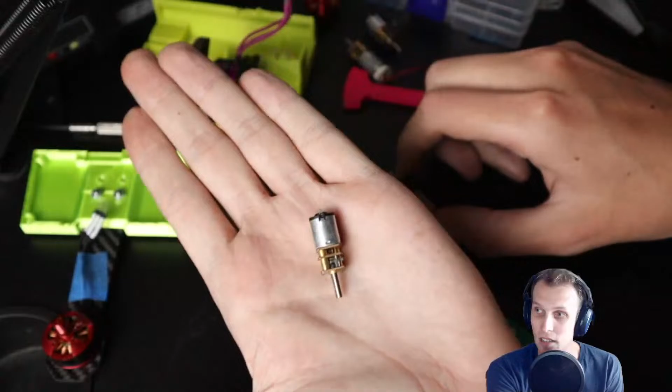So let's have a look at some of the components that I've got to do that. First up, we have these. These may look like a regular N20, but they are not. They are an N10. This here is a regular N20.

You can see this boy is ever so slightly smaller than our N20, and I've measured it out now, and it's like 5 millimeters shorter or something. It's not a whole lot, but it does have one advantage to it.

If I can get my scale open, have a look at the weight of these two things together. So this is the N20 — the N20 is about 9.4 grams. The N10, on the other hand, is 8.2. So we save a whole gram by swapping motors, and that means we save 2 grams by swapping the two.

There are other options for motors that are smaller and lighter, and I've used them in flea weights in the past, but they're plastic geared, which means that putting a very, very heavy weapon on top of them, they're just going to explode in the first hit. There is no question about that at all.

Okay, how is this going to impact the pits at ARC? This is going to be a very, very heavy weapon on top of an ant-weight robot. This weapon is going to be half the weight of the robot, if not slightly more. If anything, when I hit somebody, the entire robot is going to go flying.

I'm probably going to go over the walls. If I don't go over the walls, there's a high likelihood I'm going in the pit. That is what it's going to be, unfortunately. This is the price I pay for the absolute chaos I'm about to inflict on the arena when I get this whole robot going.

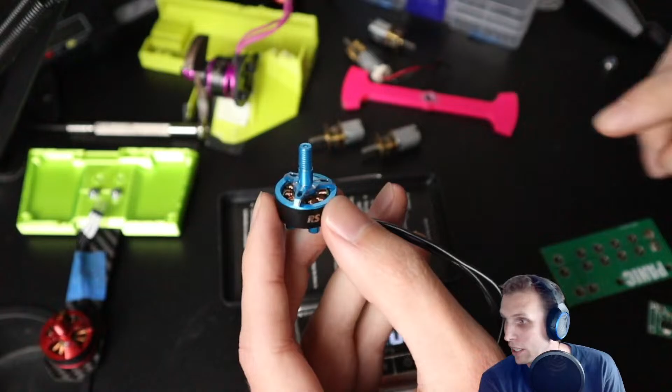There we go. This is a 1507, as you can see. It spins faster, it's slightly smaller in some aspects and not all, but it does have a 3mm weapon shaft at the bottom, like a motor shaft in through here, so it's actually going to be stronger than these 1806s.

Now, the problem with this that I found out earlier while I wasn't actually streaming was if we throw down the motor, that's about 18 grams. Our new motor is actually slightly heavier, but it also has a lot longer wires. So cutting these wires all the way back is probably going to save us a decent amount of weight, maybe a gram. So the difference between these two motors is actually fairly similar in terms of weight.

The other thing we have going for us with this guy is that it has quite a long weapon shaft, so we can probably trim this down a little bit and still have a lock nut going on, and get that all working.

You love my fight recap videos. Cool, I'm glad. I really enjoy making fight recap videos.

There was supposed to be one out this weekend. Unfortunately, things got very, very busy. That's also partly why I'm streaming very late at night. I was supposed to get CAD stuff done this weekend and just ran out of time. Life happens sometimes. So yeah, there was supposed to be one out, it might come out Tuesday. It depends on how things go this evening and tomorrow.

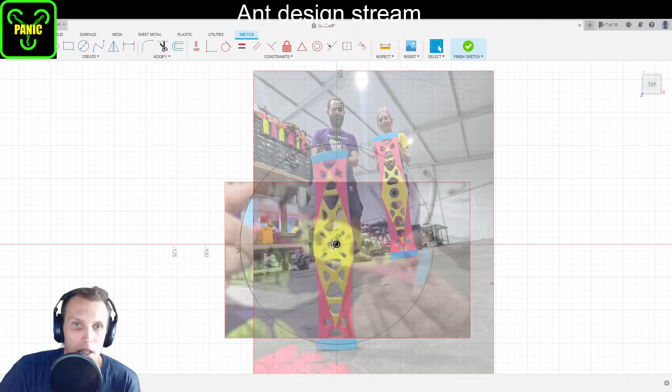So the problem that I'm seeing here is if we actually have a look at this right in the middle here, this shape is the thing that I don't know about at this point in time. It's this kind of weird clover shape thing going on, and all I really need to know is if a 5mm bolt is going to fit through that and not be too loose, which is very, very hard to tell here, but I think looking at this very blurry photo, that is going to be right.

Now, the reason I've got this one rather than this one is that this one has kind of a parallax thing going on, like the blade is kind of tilted at an angle. It's not straight to the camera, which means you can't get an accurate idea of the hole diameter, unfortunately.

So this one is from a different image of the team holding it up in their fingers, and it is actually just ever so slightly straighter on, which means that while the pixelation in this is just disgusting, you can basically just about tell that it is around about 5mm. It's close enough that I'm like, yeah, I think this will be okay for what we're trying to do here.

Will your new PCBs be lighter because they save on wiring, or will they be heavier because of the PCB material?

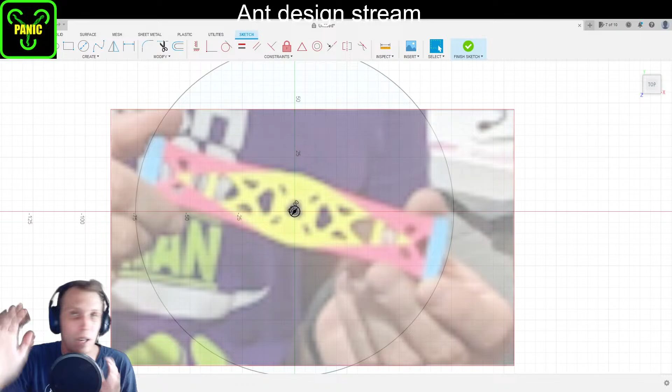But at the moment, this rough thing I've done here has made me confident enough that I'm not going to need to print a placeholder or something - that hole is going to be about the right size for my 5mm bolt hole here.

So, okay, we're going to go back to Tinkercad now. Not Tinkercad, 123D Design. Here we go. I'll catch you up a little bit on what I was doing before I actually pushed the go live button, because yikes.

Anyway, let's take a look. So this is currently where the design is sitting. This big red section at the top is the area that the blade itself is going to carve out. This is a 6-inch, or 152 millimeter - sorry, not sphere, cylinder, that's what I'm going for. Wow, okay, yes, streaming may have been an interesting idea this evening.

Anyway, then we have the motor that I mentioned before. Now, one of the things I'm going to quickly run through, because I did actually try and do this on camera and then messed up my cameraing, is I'm going to go back to the desk cam.

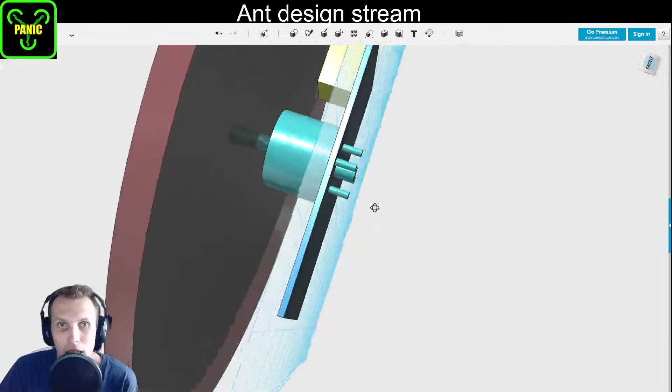I'm going to show you how I got the bolt hole patination in the bottom here, because it's actually quite easy to do. Now, what I'm going to do before that is take a quick copy of this, move it over, and delete the bolt hole patination off the bottom, and we're going to redo it together, because I have a method that works for me. I don't know if it's a correct method, but it seems to do okay, and it might help some of you out there with your CADing in the future.

Whoops, don't do that. We're going to go down. I think this is going to be 7mm. Yeah, cool. Right, so we've got a blank face on the bottom.

You missed fighting me at the January meet of ARC. Building a second version of the bot and looking forward to coming for more events. Oh, cool, yeah, it'd be good to see you at an ARC event. How did you go in the ARC event? Obviously I missed that one because of featherweight fighting, which is unfortunate that they landed on the same weekend. Thankfully, the next set of featherweight fights are not on the same weekend as ARC, so that's good - I get to do both. Yay!

All right, let's actually get the bolt hole patination going on this thing here. So how do we do that? Let's go back to the desk. To do this, I'm going to zoom us down onto the motor and get my camera to actually focus up, and then I'm going to grab some bolts.

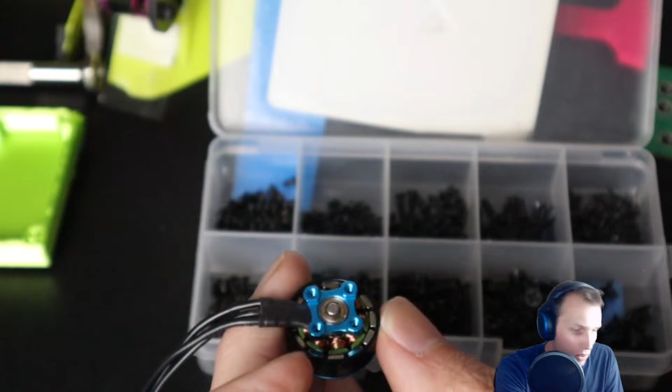Now, normally with this you would need to work out what size bolts they are, but I know now that these are 2mm bolts because I did this earlier. So I'm taking a 2mm bolt, which is what this is, and jamming it into here, one into each side. So I've now got 2 bolts, and I'm leaving them stuck out on purpose.

I then grab my calipers, wherever I put those. Here they are. And I'm going to first measure my bolts. So my bolt is a touch under 2 millimeters, and that's about right. Bolts never are exactly - like an M2 bolt is never exactly 2 millimeters - because of thread pitching and all that kind of stuff, and clearance, and yada yada.

So they're just a touch under 2 millimeters. If I then measure the outside, grabbing in there, we get 13.5. Now, again, my 2mm bolts aren't quite the right size, so that means these are about 14mm edge to edge here. And that means the inner distance should be 10mm because you take off 4 millimeters. Yep, so there we go, 10mm.

And that means the center to center point is 12mm. If I get my calipers to roughly 12mm, that should be roughly center to center, but trying to line that up by hand is just rubbish and ridiculous, you can't really do it. So by measuring the outside and the inside, you should get an idea of what that bolt spacing is.

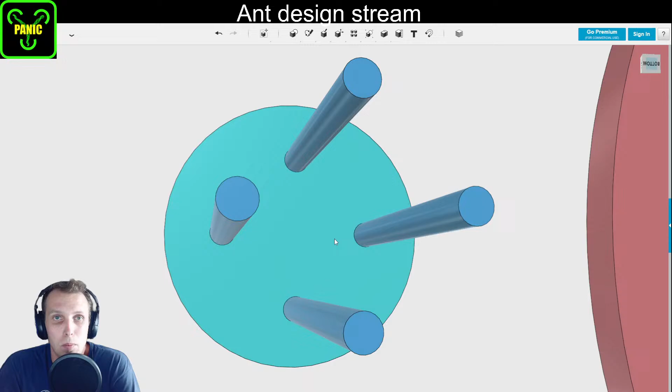The other thing I will say is that while this bolt patterning is usually the hardest part, the thing I always forget to do is leave an extra hole here. Now the reason you need that, going back to the desk, is for our center point in here. The back of the shaft, especially on, well, not this motor, because this motor has been designed so the shaft doesn't actually stick out that much.

But if you look at like an 1806, the shaft of the motor sticks out a great deal, and it also has a circlip on it. That circlip spins with the motor, which means it's spinning at very high speed. So you need clearance around that circlip. Otherwise it's going to be rubbing against your chassis, creating friction, slowing your motor down, and putting a lot of energy drain into your motor. So you always need to make sure you've got a hole with spacing for the shaft as well.

So if we go back into here, I know my shaft is 4mm, so we're just going to put in... whoops, that's way too big, that's 4mm radius, that's not what I want. I want 2mm radius for a 4mm shaft. Put that in there, and then I could merge all that together and shorten my bolts down, and you'd end up with the motor that I made before I actually went live. So, yes, there we go.

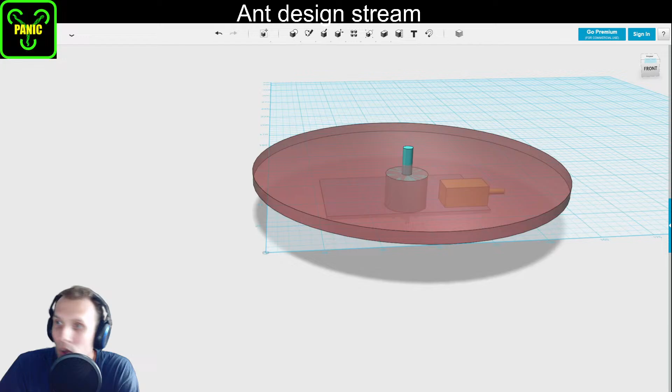Any word on when Robot Havoc will happen? Yes, Robot Havoc 6 will happen in August. It is part of Science Alive, it always is. Let me double check when Science Alive is this year. Science Alive 2013 is the 5th and 6th of August. So that means Robot Havoc will be on at Science Alive on the 5th and 6th of August this year. I don't really know much more about it other than that's the current plan. Also nothing is fully locked in yet, so don't take my word as absolute gospel, but that's when Science Alive is happening this year, so that is the likely time for Robot Havoc to happen again.

Mini hijinks, kind of. I've got the hijinks bar coming in, however I think making it into an undercutter is going to be exceptionally difficult, so we're not going to do that. We're actually going to make it an overcutter, which is what this CAD currently shows.

That's where we're going to try and go with this design, mostly because it's such a large blade. You can see that this is a 6-inch blade. Trying to get the wheels out the other side of it anywhere is just so much size and so much space that it's going to be too big to try and do anything like that. So yeah, overhead spinner it is instead.

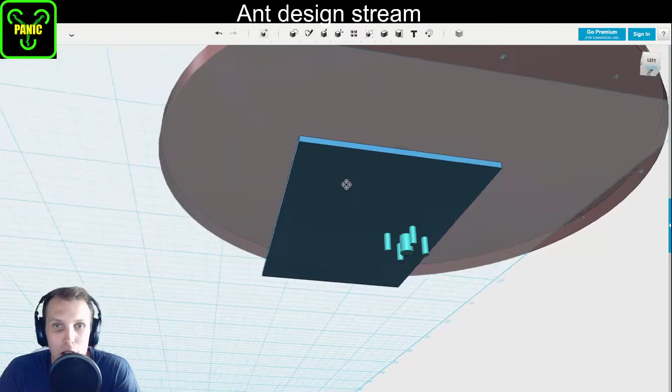In this case, I have currently got the N10 motors, that is our brushless motor, and there will be another N10 over this side as well. I'm currently thinking about using PCB material for the base plate of the design here, because I've been messing around with using that as weapons very recently, and I'm thinking that as it works for weapons, it should work as a thin, light base plate material for a robot that needs to be as light as I can possibly get it.

Any progress on Zap being built, or are you focusing on perfecting the Beetle version?

I am focusing on perfecting the Beetle version. The last event that we went to, I took the Beetle version 2 without weapons, and it performed way better, which honestly was a bit exciting and disappointing all at the same time. It's exciting because I got the thing working finally, and it actually spun up and it melted and it hit people hard and it threw itself across the arena. It was great, that was a lot of fun. But...

There wasn't that much changed between it and the old version with the weapons, other than removal of the weapons. So the big thing that got changed was the removal of the weapons, which means that removing those weapons increased its performance, which is real sad because I want the weapons to work really, really badly, but they just haven't been so far.

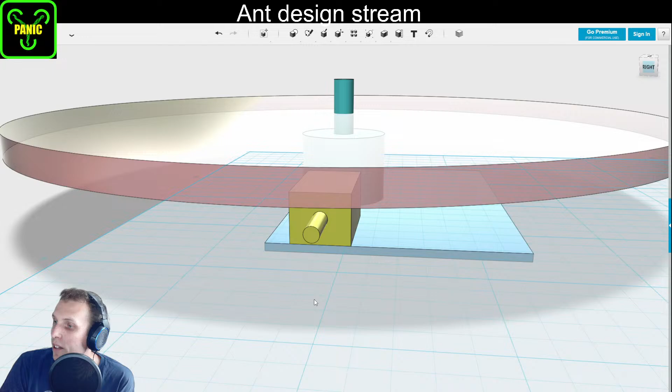How will the super glue bicarb soda do as armor for a chassis? That is an interesting question.

Super glue and bicarb soda does create some kind of plastic polymer of some form, but I don't know how effective that would be. I don't know the material properties of the plastic material that is created by super glue and bicarb soda. I've used it as a quick fix tool before to try and get some things working and stick some stuff together fast, but I've never really tried to put load on it or have it impacted.

It'd be an interesting one to try. I've seen people try and molded dice from bicarb soda and super glue, and I know that layer adhesion is kind of a difficult thing to get right, so I feel like you're never going to get a perfect brick of material that would be useful as an armor panel, for example.

For the Zap Beetle, what if towards the outer edge you had a stylus that could help provide sensor data? Yeah, that is one of the other things that I'm looking at. Currently I've been using what's called dead reckoning - I've been using the speed of the wheels to determine how fast the Melty is and how fast it's spinning and stuff. But that isn't the greatest solution for melting.

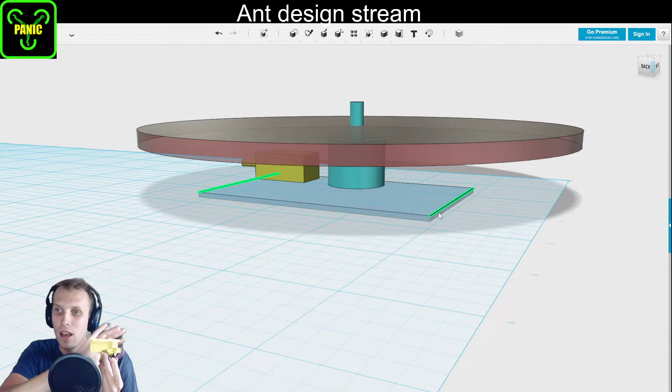So anyway, we have a little box here, or a little PCB stand-in base plate that is currently 51 mil long and 82 mil wide, which is good. I've got this as a party here, and it is bigger than this by far, and it ran like a 25-gram weapon. So we don't want to be anywhere near the size of this as a party. We want to be as small and compact and tiny as we possibly can be.

Now, to aid in that, what I'm thinking is I'm going to build an ESC into the base plate. So rather than use DF Robot motors or a Malenki Nano or anything, I'm going to build my own ESC directly into the robot's base plate, and also run all of the wiring through the robot's base plate too.

And even with all of that, I still might need to put speed holes in it, just because it's 1.6 mil thick of fiberglass. It's going to add a little bit of weight.

In fact, I do have a board here, a PCB, that I can put down and weigh really quick. It's not quite the same size. All right, that's 8 grams. That's my power distribution PCB. That's 8 grams with a lot of copper in it, because I had to put a lot of copper in these so they survive distributing power. That's 65 wide by 33 long.

That's 8 grams for something that is smaller than this, in both dimensions. Our chassis needs to be about... where are we? I can't get that to work on camera. Yeah, so our chassis is going to need to be bigger than that.

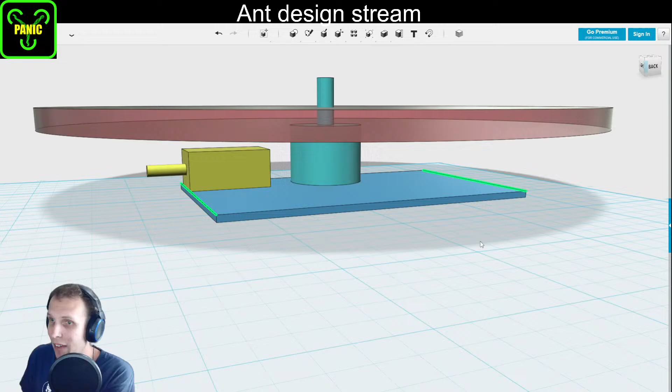Maybe the PCB substrate needs to have holes in it. It may be a case that we need to run some speed holes back here where we're going to be mounting the electronics, and then just run tape underneath or something. Or tape both sides, like a tape sandwich, to block those holes and run way less weight. But it will probably rely on what we actually do with the SMD componentry that I want to put on this board. Anyway, we should keep going with this.

We're going to put down our other motor literally by mirroring it into place. So if we go 10 mil, we're then going to mirror the whole motor by that plane. Done.

All right, so at the moment we currently have our weapon blade, well, our PCB sitting directly on the ground. That's not going to work. We need the whole system to lift, and we probably need, at a bare minimum, 2 mil clearance just for bolt heads and stuff. So in fact, what I'm going to do is 2.5 mil clearance, because that's going to give us, hopefully, enough clearance to sit everything in underneath.

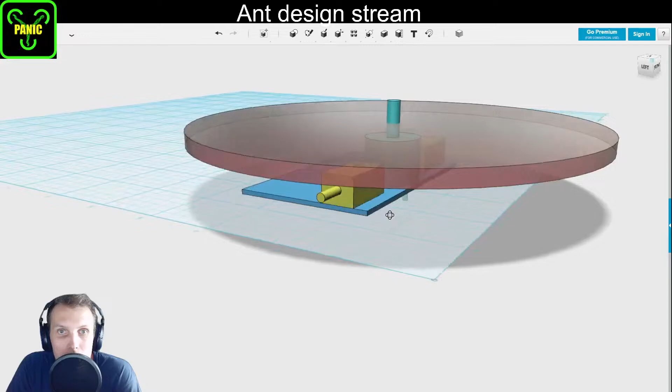Now, the question here is, I need to actually put a floor down, so we're going to put down a block, and then push that down into the floor, or to the floor level, and extend it.

Whoops, that's not what I wanted to do. That was the wrong tool. This is the right tool.

Bam, okay. So now I want to look at shaft to floor, that is 7.8. And shaft to weapon, that is 9.5. So we've got like 1.5 mil between our wheel and our weapon. Yikes, that's probably going to be a little too close. So let's see, we're 2.7 high. Let's actually grab all of that again.

I need the weapon and I don't want the floor. Let's push that down by, I think, 0.7. We're going to do 0.5. Okay, so that's going to give us a different distance to the ground: 7.3, 9.5 still. Cool, all right.

7.3. What is the radius of this? The radius of this is 1.5. 8.8. Okay, so let's get a wheel CADed, or a rough wheel CADed. This is going to be 8.8. We're probably going to do 12 mil.

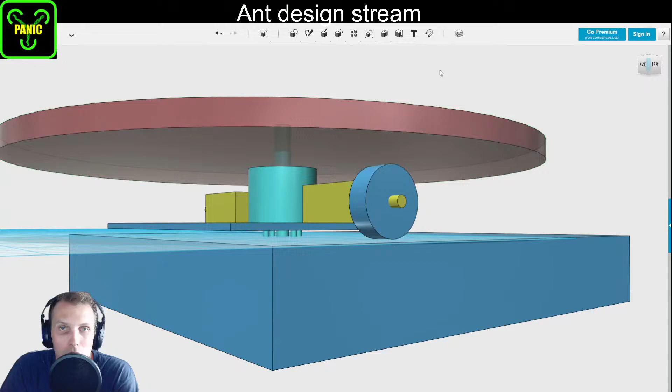That's 2 mil now. Oh boy, 2 mil deflection, and it will clip the wheel. That's honestly not a lot of deflection for a bar this size. Let's actually take a look, how far out is that? 2 mil deflection, so it's 2 mil this way at like 32 distance. That's possible - we could clip our own wheels here if we're not careful.

And I'm going to have to be really, really careful molding and making these, because they need to be exactly on center. Otherwise, if they're 2 mil out, they're going to clip the wheel when they rotate round, unfortunately - clip the weapon when they rotate round.

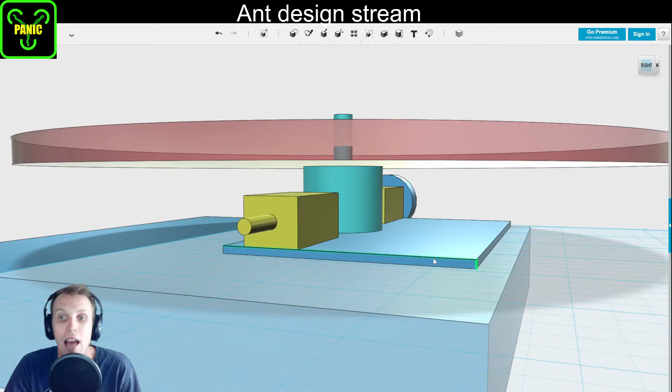So the plan is to have the PCB as part of the chassis. Yes, 100%. It's light, strong material that's really thin, and I think doing that is going to be way better than a 3D print in a lot of ways. Because, yeah, a 3D print - so this is 1.6 mil here. A 3D print that is 1.6 mil would be lighter than this, but it would also break immediately on the first hit. There's no way even an ABS print at 1.6 mil thick survives an impact with somebody else.

So yeah, we got to do what we got to do, and in this case that's a PCB base plate. I'd say carbon fiber would probably be better, but I can get PCBs done quickly and easily, and machining carbon fiber is nasty, nasty business. You need respirators and water filtration, or water running on the part at all times, and even then you need to be really, really careful about where all the dust is. If you can avoid doing it, avoid doing it.

That's why I use carbon fiber drone arms and things, because they are the better option - they're a pre-made thing. You don't need to cut carbon fiber yourself.

Could you make the bar thinner where it passes over the wheels? I mean, maybe, but again, it's the hijinks bar - I'm buying this weapon bar, literally this one. So to make that thinner, I would basically have to make up a little rig where I was spinning the hijinks bar and then push a Dremel into the underside of it at just the right spot to route out some clearance. Theoretically possible, difficult, very very difficult.

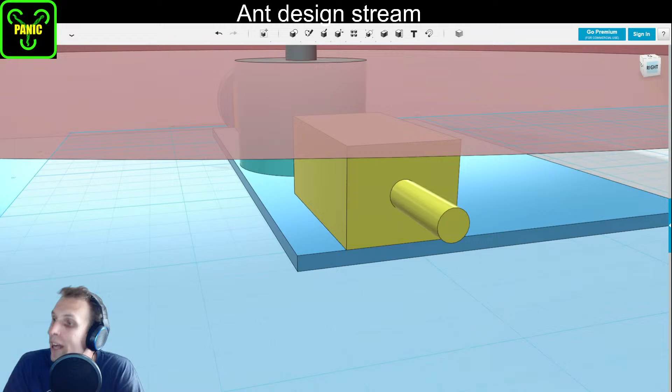It will remove the paint job as well, which would be a shame. Yes, it would. The hijinks bars are very pretty. I love them. That is partly why I'm doing this build in the first place. Well, actually, it's the entire reason I'm doing this build - I saw the hijinks bar online and went, I gotta have one of those. That's just too cool. I just need one of those. And here we are.

Super glue, someone says, for the motor mounting. Yeah, I mean, that would be cool. Let's see if I can get my camera going just for a second, because I did actually do a test just before that I think you will be interested in if I can... no, it's not going to work for me.

Come on. Let me just give me half a second, see if I can get this to work. Let's see if this... nope, okay. The camera has decided... yeah, camera has decided no, unfortunately. So we'll go back to CAD.

Yeah, could definitely cable tie the motor mounts. So what I was going to show you is that this particular PCB, two of those holes have solder in them right now. That is because a while back I saw somebody solder motors to a PCB to keep them in place, and I was like, that's a great idea, I want to try and replicate that. So I took one of my power distribution PCBs for featherweights and tried to solder a motor directly to it, and it held for like half a second. My first attempt, I just waggled the PCB around and the motor fell off. The second attempt survived the waggle test. The second I brought it to another room and dropped it on the desk, though, the motor immediately popped off. So I was like, all right, well, that's not a way that I can do this.

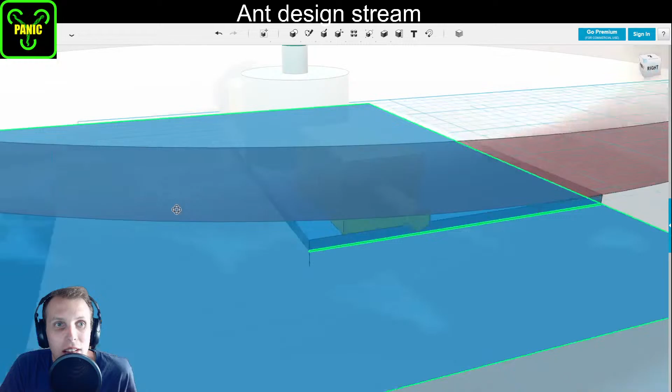I do probably want to print something into this chassis, though, so that I know where to seat the motor. I think that's going to be a good idea, because I do kind of want that knowledge of like, cool, this is exactly where these things need to sit.

Now, the other thing I want to do right now is I want to actually start looking at walls on this thing. So I'm going to hide the weapon for a second, and I think we're just going to start looking at the wall spacing. So I'm going to cheat the walls a little bit here - actually, let's not do it that way. I think I want to shape this out a little bit too, because a square is kind of boring. So we're going to throw some chamfers on the edges, just on these back corners, again hoping that we have enough space for everything. But also, big chamfers on the corner means less material for the PCB, which means a lighter PCB, and we like that. That is a very good idea.

The other thing we want to do, we're going to set up... all right, so radius - actually, we'll do that later. Let's get a set of walls going. The way I'm going to do this is really easy: I'm literally going to copy my base plate. In fact, I'm going to take a second copy of my base plate and leave that all the way over to one side. Then we're going to extrude our base plate to be the height of everything else. Actually, we're probably going to need - yes, of course, it's a weird angle or a weird number. Cool, so that's the height of our motors, that's all the space I want in this thing. I want it just to have the height of the motors. That's going to mean squeezing in battery, ESC, receiver - everything's going to be a tight jam into this. So we probably need a quite solid top plate so that the electronics don't bulge out of it.

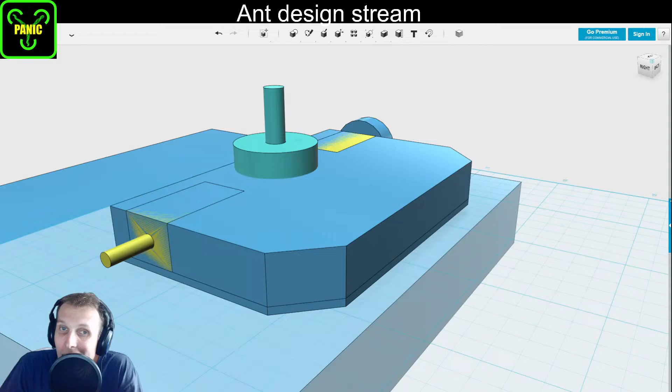Will this have feeder wedgelets if possible? I don't know, it will be very dependent on weight. Because I also want the reach to be as large as possible, and if I show solids, this has got a pretty decent reach at this point in time. But if we put feeder wedges on it, it reduces the reach down a little bit. Also, they're going to be heavy, they'll add weight of some form. So I don't know, we'll see.

I think it will be a case of we'll get everything else together and done, and then if I've got enough weight for feeder wedges, I will reprint a chassis that I can mount some floppy forks to the front of, I think is going to be the go. I don't think rigidly printed wedges is really what I want to go for with this design.

Mostly because I want this thing to sit upright like this. I don't really want the blade to angle down. I've done that before with very obvious results, and they get really difficult to drive really quickly. So keeping the blade horizontal is definitely what we want at this point in time.

Just joined the stream, no idea if it has a name. Just recommend glass cannon - yeah, I mean, that would be appropriate, I would say. I'm not sure if I'm going to call it glass cannon. I mean, I am using a hijinks blade.

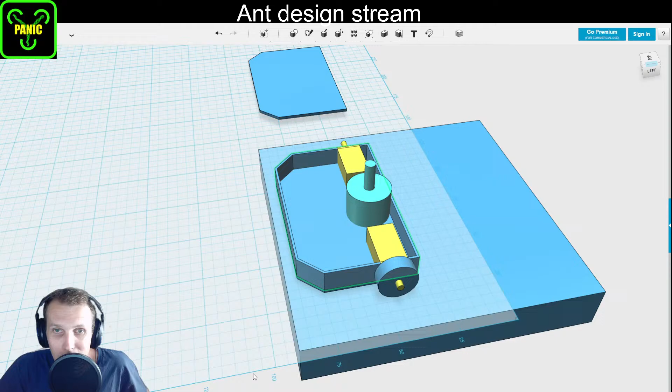I do like the idea of having like an homage to hijinks in some form, but I'd want it to be a combination of things. So like Annie, Are You Okay is a combination of my love of pop culture names and Robert Cohen's crippling depression theme. I'd want the name of this robot to be Hijinks, but pop culture, if that makes any sense. So if you've got any names that fit that bill, please let me know. I am considering anything at this point in time, because I have not named the robot.

So I've just sped through what I did there, but literally I took the same shape as the base, extruded it up to the height I wanted it to be. Then I did a shell cut from it so that I've now just got walls and it's got its own base plate, that's why I moved it across. I'm just going to punch that out now, and now we just have the walls - exactly what I wanted, well, close to. We've got some extra features we need to put in, like these walls don't have holes for our motor, and we definitely need holes for our motors to stick out of.

Low jinx. Oh, I really like that. Mostly because, yes, lower weight class, but also, so hijinks has the weapon mounted underneath, low jinx has the weapon mounted on top - just a complete reversal. Brilliance. That is my forerunner right now.

I'm not sure if it's going to stay that way. It's going to, as I build the thing, I usually come up with names during the build process, so during CAD they don't normally have names. In fact, all of my file structure for my CAD designs is done around weapon type rather than names of robots. So the Annie Are You OK folder on my computer is just listed as Beetle Undercutter - it's not listed as an Annie Are You OK folder because I CAD'd her all the way up and then came up with her name during the build process as I was putting bolts and stuff together.

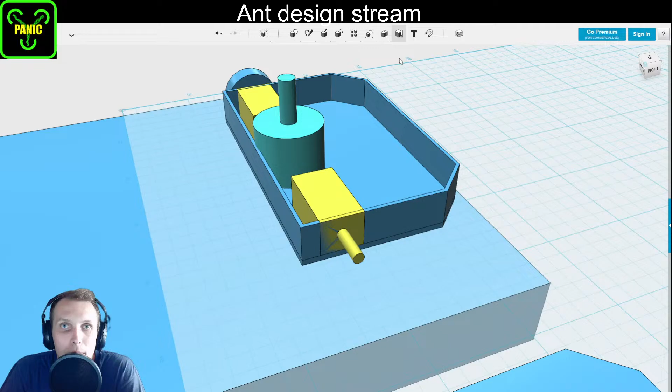Now, next thing I wanted to do was put a shield around this because we don't want anything touching the motor that is spinning it at ridiculously fast speed. So let's see, 10.5. Let's go.

I think that should about do it. And what we're going to do is we're going to cheat this on here. 16 mil down. Okay, cool. And then we actually want to push this down to the same height as... Perfect. So that is going to make up our motor shroud.

Mr. Bojangles? No, Mr. Bojangles is already a robot at ARC. I'm not going close to somebody else's name. We're going to leave that one well enough alone, I think.

So what I'm going to do, we're going to cut the motor shroud down. Where's my subtract tool? There it is. Bam, bam, bam. Then if I move this out of the way, like so, we've now got a space in there. I'm going to push this back 1 more mil, and that is our motor shroud, mostly done.

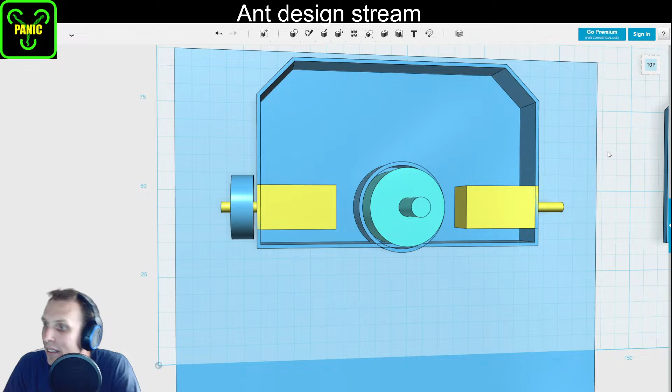So let's go into here. Cool. So that gives us our 1 mil spacing around the motor, which... yikes, that's not a lot. Yeah, it's really, really not a lot. But I mean, it's better than nothing.

And we could push this out a little bit. In fact, you know what, this is feeling a bit sketch. So we're going to push this out by an extra mil just to give that motor just that little bit more space. Now the next thing to do is to cut all of this so that...

Yeah, now which way do I want to do this? This is interesting. Because we can either leave this as a hole in the front, so we have a flat front plate, or we can build this in. Okay, I think I know what I'm going to do. I am going to make the circle on the front, I reckon.

You could mill some 2 mil carbon fiber for the base plate, and add 1 mil recesses for the motors and zip tie them in. It would work, but it's a terrible idea.

Yeah, I could. As I've already mentioned, currently the base plate is 1.6 mil because I'm going to use a PCB. As mentioned before in the stream, carbon fiber and machining carbon fiber is dangerous and messy, and if you're not set up for it, it's just not a good idea. I am not set up for it. I don't even have a CNC in my house. I'd need to go to a makerspace. And then I'm CNCing carbon fiber in a public setting, which, I don't know, that just feels dodgy to me in a lot of ways.

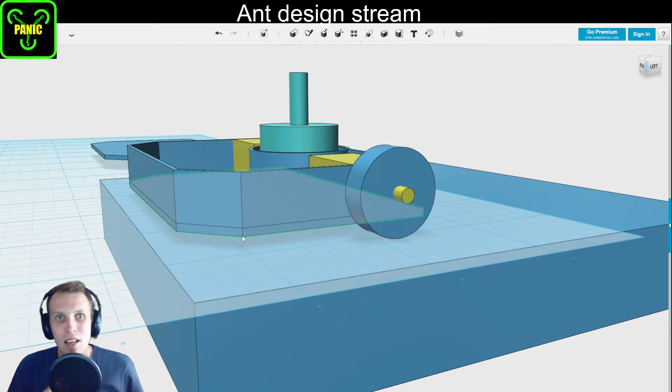So yeah, I'm not gonna mill carbon fiber myself. I'm gonna use PCB material, which does mean CNCing slots into the PCB is going to be very, very difficult. So setting them up and super gluing and zip tying them in, I think is going to be the way to go. Yeah, it's going to be interesting. I've only got two N20 motors, so if I super glue them in, that's the chassis we've got from that point on, I guess, because yeah, we're going to be in trouble if they break, basically.

Right, so I'm going to do a little quick trick here. What I'm going to do is I want to cut out just this section in the middle of this ring. So the way I'm going to do that is I'm going to subtract. I'm going to grab this outer wall, and from that outer wall, I'm going to subtract one of the motor shields, which means that now this wall looks a little bit different.

If I move this out of the way, you can see I've now got two little slots in this wall, which you might be like, well, that's not really going to do too much. But we are going to then be able to grab just the face of that middle section and entirely remove it. Bam, just like that. And now we can put this back in place, like so. And if we merge these two pieces, then that will become one solid part and just work from that point on exactly the way we want it to.

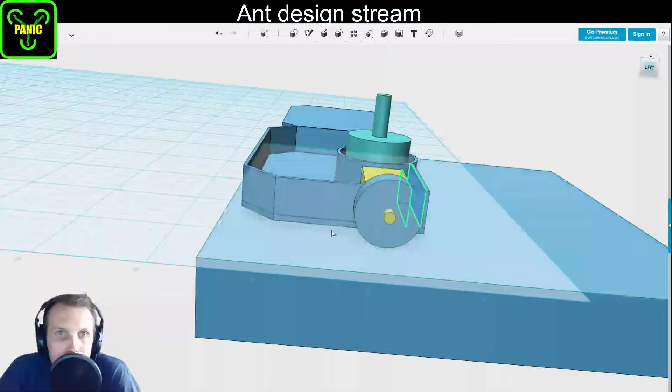Is there going to be enough weight for top armor, or do I have another idea for preventing the wiring from getting sucked into the weapon? There has to be top armor. Yes, I want to do everything I can to get top armor on this design, because you're right. Otherwise, without top armor, everything's going to get sucked up into the weapon.

Now, if I put the weapon back on, from here to there is 6 millimeters. So I've got 6 mil between the top of my design currently and the weapon. So I've got enough space to put in like 2 mil HDPE or a 1.6 mil piece of PCB. Like I might just clamp another base PCB to the top and bolt them together that way. Maybe that's always an option for like a lid design.

Yeah, I don't know, but yes, definitely a lid. Hello in chat there. Yeah, we can't not have a lid.

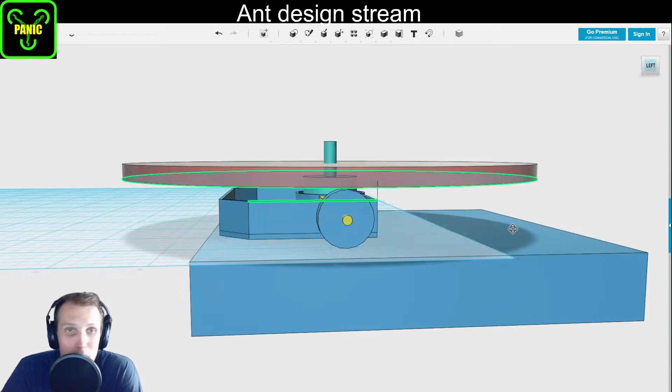I got away with kind of dodgy lids before because I was pushing all the electronics to the back, out of the path of the weapon. But in this particular design, nothing is out of the path of the weapon - it's all in the path. So we need to do something to make sure they don't get sucked up into it and lose the fight by self-annihilation.

Cool, so let's get rid of this weapon again, we don't really need that for the moment. That's the wrong button, that's the right button. The next thing we want to do is add holes for our motors, which again we're just going to do by subtracting. So I'm going to grab that, and subtract. Now our motors have space in our walls.

Now, the other thing that's happening right now is that these walls are ridiculously thin - they're 1 mil thick. They are not going to survive anything. They're one hit and they're going to just be eradicated.

I don't really know what I want to do about that, because thickening them up will add way more weight. Realistically though, it should be pretty well protected underneath the giant spinning disc on top, so unless somebody's really, really low, they're not going to hit us, hopefully. Fingers crossed - it's going to be quite the challenge to hit us.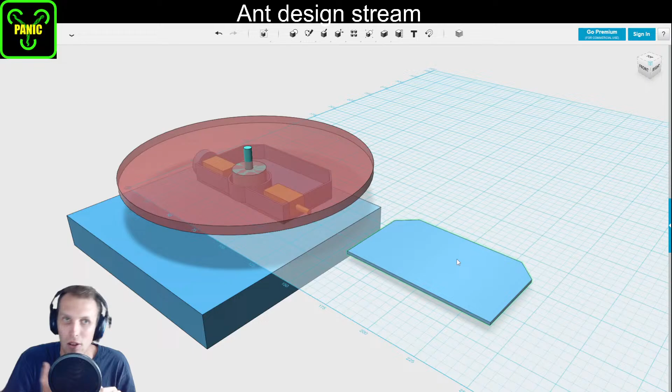My old weapon, the pink one, is 103 millimeters, and this new weapon is 152, so it has like 25 mil of extra reach that even that blade didn't have. So we should be contacting first, as long as something is high enough up for us to hit. Theoretically. Though from the back, we might be susceptible to a hit.

So maybe we buff the back and not anything else? That could be a doable solution here. Let's take a look - if we just give the back a little bit of extra. I mean that's only 2 mil, but that should be okay. If I print this wall out of TPU it should be totally fine.

That's an idea, TPU would be a good one. I was thinking about maybe trying to CNC this out of HDPE, but I think even 1 mil HDPE is going to be a bit of a stretch here. Oh, and it's 10 mil thick - perfect, I have 10 mil stock. I could very, very easily CNC this if that's the route I want to go.

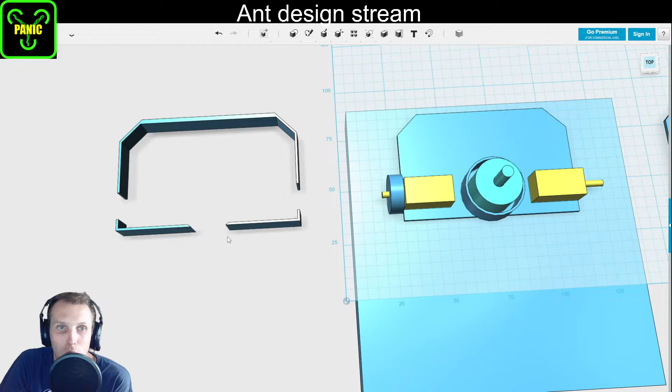Interesting. The only thing I've just thought about is that having cut the access point for the motors, I've made 2 separate sections of wall - actually 3 separate sections, although these will get joined in with the motor shroud, so they'll go back to being one when we get to that point. But that does mean we've got separate sections. It's actually probably not a bad thing, because if I'm CNCing this out of a billet, then I can cut the shape separately, and this middle section here isn't wasted material.

Yeah, that'd be cool, we could definitely do something along those lines.

I don't really know how I want to approach that, because TPU or HDPE should both survive pretty well, although again 1 mil thick is probably not great. As mentioned earlier in the stream, if I wanted to do forks on the front, there'd need to be long forks to get anywhere important out here. But if I want to do that, I need mount points up the front here. So I guess that means it needs to be printed out of TPU, probably. I think TPU is heavier than HDPE though. Material selection is always a problem.

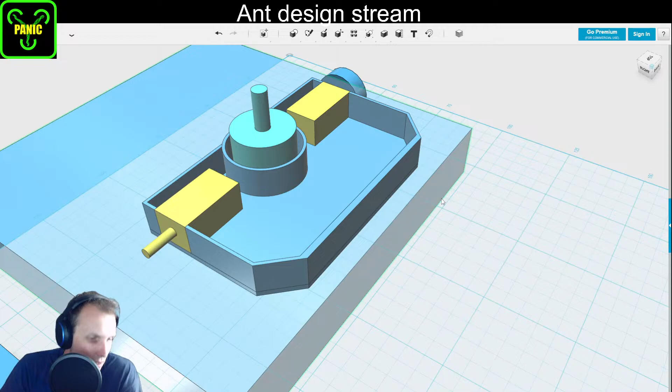Anyway, let's keep cracking on with this design. Now, the other thing I want to do here, I'm going to get rid of this for the moment. We want to have a look at cutting our holes for our motor.

First thing I'm going to do is turn this 45 degrees, because that means our wire comes out this way, down into the robot, and not out towards either of the motors. That means we don't need to worry about any of that.

And then I'm going to want to effectively put a gap. Oh, that's not what I wanted to do. That is what I wanted to do. I want to put a gap in... come on, do the right thing this time. Thank you.

I want to put a small hole in underneath here so that the wires for the brushless motor can come straight out into the electronics bay, and also keep this wall up around the brushless motor, stopping it from wrecking everything, because it's going to be spinning very, very quickly.

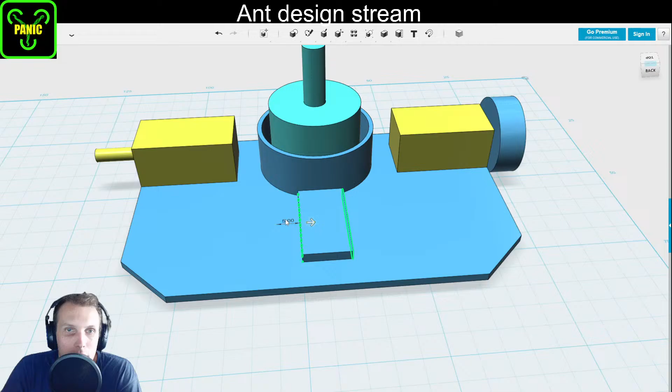This, as you can fairly well see, is just a lot of guesstimation. It doesn't need to be very accurate. Literally all it is, is just to feed wires through. So as long as it's large enough to get the wires through, it will serve purpose.

I'm just going to make it just that touch bigger. Yikes, that is quite big. So if we then subtract that from there, we've got a nice little hole that allows us to feed that wire in. Beautiful.

What a coincidence, just watching a video of Annie, are you okay, battling about 3 seconds ago. Oh, cool. Which video was that one? I mean, Annie has had a lot of battles in her very long career as a combat robot.

She performed pretty well, on the whole she performed pretty well. There was a period there where I was using her as a test platform for every weird and wonderful drive idea I've ever had, and during that time she didn't perform particularly well. But that's kind of what happens when you sort stuff out that way, or when you're experimenting with weird concepts and design ideas.

Right, yes, we are actually sitting pretty good at the moment. We have got things mostly together. What I'm going to do, I'm going to see if I can just quickly find a battery here.

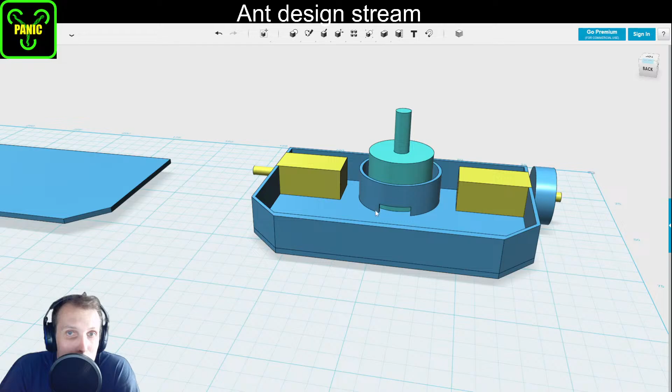Now, this screen doesn't show up. You can see me moving my mouse, but you can't actually see what it is that I am looking at here. Oh, well. All I'm doing is looking through all of my files for a particular battery that I've built in the past, and maybe I didn't separate it out from other designs. Let's take a look.

Nope, that's not got one in it. You're going to have to give me half a second here as I try and find a thing that I thought I had already saved out, and apparently it's just in a design right now. It will be in one of the drums, because in the early days of building drums, I was making sure I was CADing literally everything.

Oh, okay, no, it is not in any of those. That is a problem, because I don't actually have a battery to hand. I have other things to hand, like other robot chassis and stuff. Oh, actually, no, I do have a battery to hand. The mess on my desk is actually helping us out in this particular instance.

So we're going to cancel out of that menu, and I'm going to very quickly remeasure my battery setup here. It is 34 long. Let's get a box out. 34 long by 20 wide. Cool, 20 wide exactly. And height of 11. Oh, that's going to be a problem.

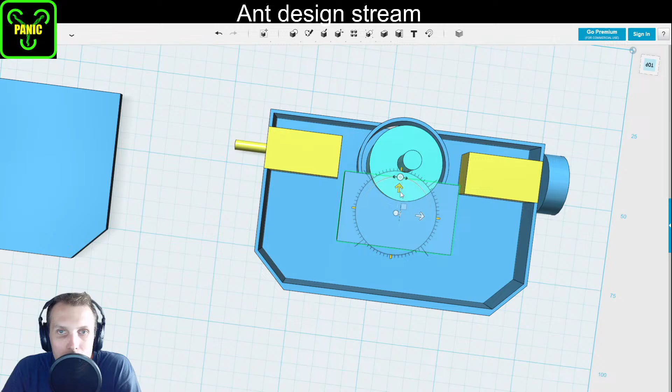Yeah, we may end up having to use not this. So this battery here that I've just put into this design is one of the very, very common batteries that people use in ants. It is the 180 milliamp hour battery. These are great, they work really, really well, but they are quite big.

And as you can see, here is massive. Compared to the space that I have in this current design, it's real big. I'm also just going to quickly change the color of that so that I know what it is. Tinge it red a little bit.

Cool, there we go. That's our battery, or one of our battery options. Whoops, that's not what I wanted to do. Don't do that. That is one of our battery options.

I can always use my custom 2S battery that I built a very long while ago that is still kicking around and still working. And for this particular design, I might need to. Not only is it a lot smaller and thinner than this battery, it also weighs a lot less too. It saves me about 5 grams, from memory, every time I swap out batteries to the custom battery I designed. So when we're talking about trying to fit a 77 gram blade in a 150 gram robot, every gram's going to count.

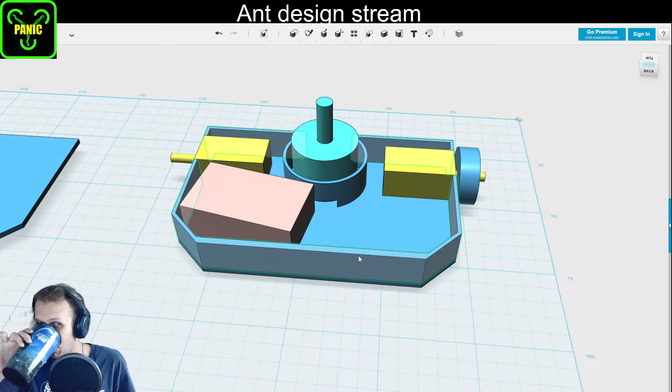All right, so I think we're kind of looking okay on this one at the moment. Now, let me just... it's actually getting kind of late here.

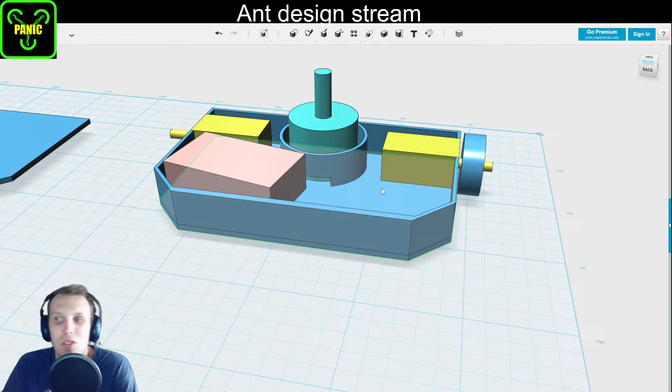Yes, but I think I'm actually probably getting close to a stopping point here. I've CAD'd in the things that I had brought with me to CAD in. I have some design decisions to make. The glue and zip tie option from you guys out there, I think is a really good one, especially for keeping the form factor of this as low and thin as possible. Probably going to do a couple of practice runs at gluing motors down to a chassis because I have a feeling it would be real easy to mess up and glue into the gearbox accidentally. So definitely want to try that out and work on that a little bit.

But I'm pretty happy with how this is sitting right now. I think, for the first time ever, I need to sit down and CAD my receiver and my speed controller that I want in here. For those of you who missed it earlier, I am going to use a PCB as the base plate material. In fact, let's sit down.

As the last guy said, use sandpaper to rough up the motor surface. Yeah, cool. I actually, when I tried to solder a motor to a PCB, roughed up the surface with a set of files, like little tiny needle files. But it didn't help. Super glue is a better idea than solder is, for sure.

I want to make this look kind of PCB-y. Yeah, there we go, cool. So that down there is going to be a PCB. Depending on how heavy that is, we will probably end up also PCBing the lid. Like, right, whoop, that's too tall. We don't want that. It's probably about 4 mil too tall, I reckon. Yeah, sorry, 0.4 mil too tall. We can just... nope.

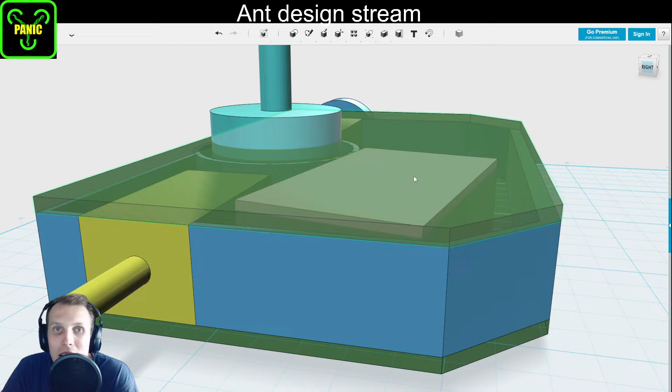Minus 0.4 to get that touching. So that's kind of what we want to do. I mean, you can see here that the battery is currently inside the PCB, which is not great. We do have some space, like even from here we've got 4.4 mil to the top. So we could bump this up an extra 2 mil, 1, 2, like that. That gives us plenty of space for a battery and everything.

Just to kind of get space for all of the things in. Even that right there would give us space to sit in that bigger battery. Again, I'm not sure if I want the bigger battery, it is going to be a massive weight drain on this robot. And yeah, that's 3.4 mil, you only lose a mil to allow for that extra battery. Maybe I do it anyway, or at least design 2 outer walls, one that's a mil taller and one that's a mil thinner, so I can choose between the two as I go. Because obviously, every time you add space in any dimension to a robot, you are adding a lot of weight because you have to suddenly stretch all of your walls to get things to work. I can imagine the vast amount of colors on the final product.

So the interesting thing here is that a lot of this coloring is for the stream. When I CAD for myself, I don't put a lot of colors down. In fact, I can show that off real quick. I need to save this out before the program gets angry with me, and then before we finish tonight, I'll flick through some of my other designs to show you what I mean. I don't normally put too much color in my designs, mostly because they're for me and I know what things usually are. But it's nice on a stream to have differentiators so people can say, hey, what's that yellow thing, instead of having to guess or find some other way of referencing what's on screen.

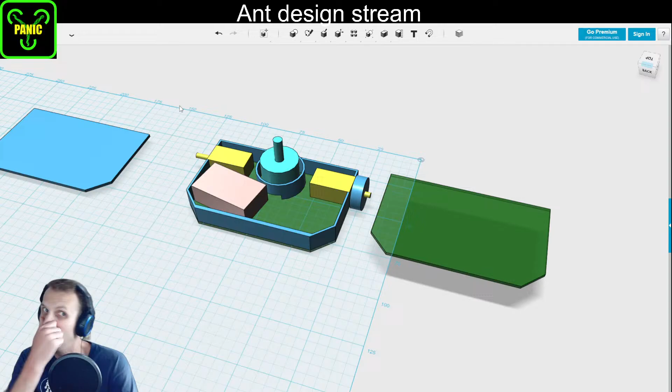Actually, I'm going to give all of you a choice here. We're going to open an ant weight of some form. Do you want to see a drum spinner, a ring spinner, a wedge, or something else? Let me know what you'd like to see from my 123D designs that I've done in the past.

I have a lot of designs here, actually. I kind of forgot just how much I do CAD up. There's a lot of things I CAD that don't ever go anywhere, a lot of robots that get conceptualized and then stop at a conceptual point, sometimes because they don't make sense or they're not going to make weight.

Alright, you want a drum spinner, okay, we can definitely do it. Well, let's do a drum spinner, then a ring spinner. Okay, now, oh, the drum spinners are interesting. Yeah, okay, let's do this. So this here is what I'm talking about with me never coloring anything.

At one point I was looking at redesigning the drums for my drum spinner. These two here are plastic prints that then had pencil sharpener blades put in them, same as this one up here, which was a 3D print that had a pencil sharpener blade put in it. All of these other ones are designs for laser cutting, or prototype designs that then got moved over into Fusion and laser cut to make my drum spinner. Cool, so that's part of the drum.

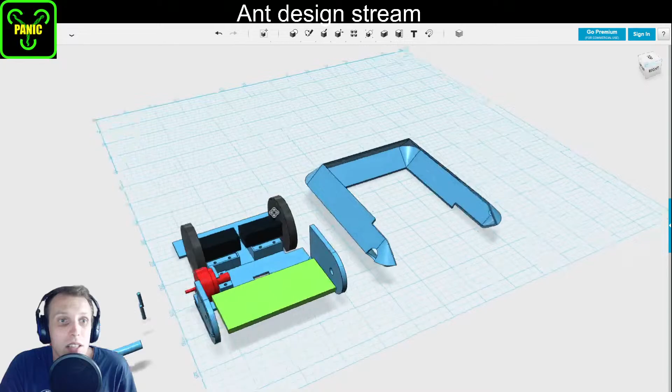The reason I showed that rather than other things is because the drum files themselves are from back at a point where I wasn't staging so much in my CAD designs. I was literally just doing everything in one go and jamming it all together in place, which meant there's nothing— oh, actually there are some other little bits in here, you can see a motor and drive wheels. And again, oh, this one's interesting, it does have color in it.

Wouldn't be surprised if somebody says wedge. Well, technically, you have just said wedge. By saying that, you have said wedge. That is how that works.

Yes, so okay, this is the drum spinner, and there you go. This is a while back, this is Don't Need Roads, a very, very long time ago, back when I was first starting to put brushless motors in things. This specific version of Don't Need Roads has a TPU frame or TPU armor and then a PLA or ABS chassis base in it, which kind of worked and kind of didn't. I didn't really ever take that to full competition.

Alright, so there was also a request for ring spinners. Let's take a look at some ring spinners. Alright.

Now let's see, I've got a bunch of ring spinners in here. This was I think the most recent attempt at a ring spinner. This one actually got made and taken to Melbourne, 2017, I reckon, 2016-2017, somewhere around there. After a couple of years of not building ring spinners at all, I took this particular version over to Melbourne. This here is very apt for me for CAD designing things these days.

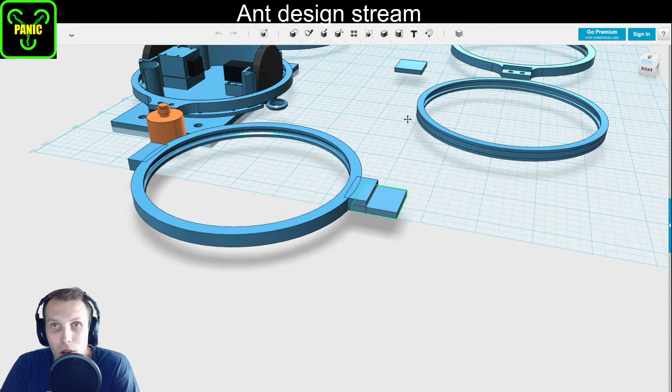I will make a part up - so this here is how the weapon teeth get mounted in. I put down a block for the teeth, and rather than cut all of these things together, I copy all of that, move it all the way over to here, and then do the merge and the cut so that this is the final output piece.

But also, if I'm like, cool, I actually want this but with 5 teeth now, I can come in here, grab an axis, and do 5 teeth. That's really easy. But trying to take this, cut these teeth back off of it, and back solve it is just really, really difficult.

So somewhere along the way with my CAD designing, I remembered to leave all of my designs in stages so that I can go back through stages. It's kind of like leaving yourself a timeline. It was probably about the time I started using Fusion that I started doing this, so I could back solve through designs and make tweaks to specific things as we went.

Full body drum spinner - I don't have one of those. I wish I had one of those. I've been toying with the idea in the back of my mind. Maybe it will happen sometime in the future. Not right now.

Remember when you got the words Team Panic laser cut into a drum? Yes, I do, indeed. That was actually the same cut that I got those others that had circles and stuff in them. That was the same laser cut job - I just got all of them cut at the same time. It was really cool, those.

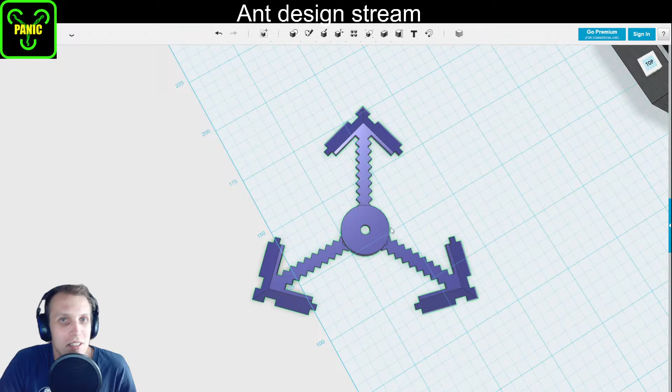This is one of the projects that, as mentioned, sometimes I mess around with an idea, I CAD it up fully, and then it doesn't go anywhere. This one actually got to the print stage. I printed this at one point, but I never made a video on it because it never really performed. The build process, putting it together by hand, I was like, this is just not going to do what I want it to do. It's not going to be an interesting design, it's not going to work in a significant way.

You can see I've just unhid some of the parts that were hid around the place, and you can see early lifter designs. So the idea was to scoop a robot from the side and get them off balance, basically. I don't know, this idea may work, it may have worked with a different setup. But yeah, this particular setup, no. I think one of the big problems is that all of this surface area was going to touch the ground, and that was just going to make life really difficult for the drive system. So while the weapon itself might work, the drive on that would be just silly, basically.

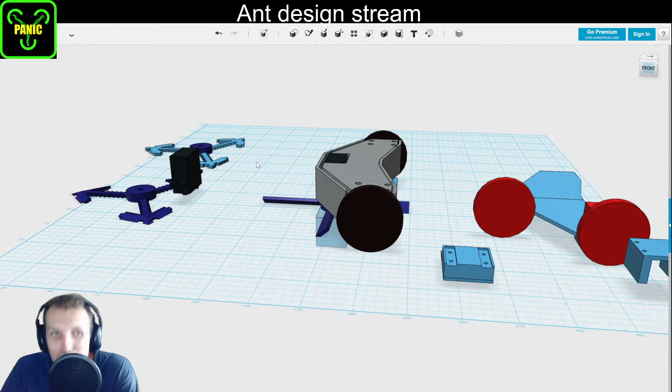It's like a horizontal mammoth. That is an interesting point, it is kind of like a horizontal mammoth.

Right, let's take a look at something else. So somebody said somebody's going to say wedge, so I'm going to show you a wedge anyway. I've got a ton of wedges in here because I mess around with wedges all the time.

Oh, I didn't realize that was in here. What do we want to look at, actually? Yeah, let's look at this.

So this here is something that was never really seen on video. This is very, very early, actually even before I started my YouTube channel, and this never fought. This was my very first wedge that I bolted N20 motors to, and I didn't even have a top plate or armor for it. It was literally just me sussing out radio gear and stuff. I printed this shape, bolted N20s to it, and just got it moving, basically.

The one thing you'll notice out of this is that these motor mounts are the same as what I am still using to this day. I think the motor mounts I'm using currently are just slightly smaller to give a little bit of press fit, but the shape and design is exactly the same as it was in 2015, 2014 era Ben Designs stuff.

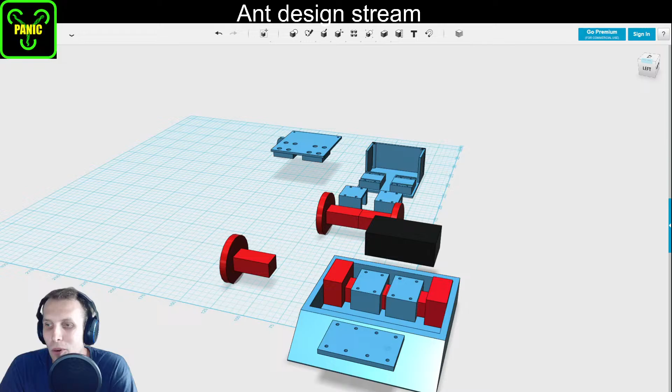Have I got CAD for MacGuffin? Yeah, I've got CAD. I've got 123D Design CAD for MacGuffin, but I also have Fusion 360 CAD for MacGuffin. And MacGuffin, at this point in time, is probably never going to go anywhere. So let's take a look at CAD for MacGuffin.

I'm probably never going to build MacGuffin, because at this point all of my stuff has shifted to the melty focus stuff. MacGuffin was never a melty, it was always just a 1-2 side puncher. It was always supposed to go bang, bang, bang, bang, bang like this. It was never supposed to spin round.

Yeah, so this here is the CAD for MacGuffin. I'm actually quite proud of this. You can't see my stuff here, I mean you can see my timeline, my goodness there's so much in here. But I am quite proud of this design, there's a lot of stuff in here that I really like.

So let's take all the armor off. This is MacGuffin sans armor, and you can see it's a fairly slim design. It was all going to be done out of laser cut hardox, and everything was going to be shock mounted.

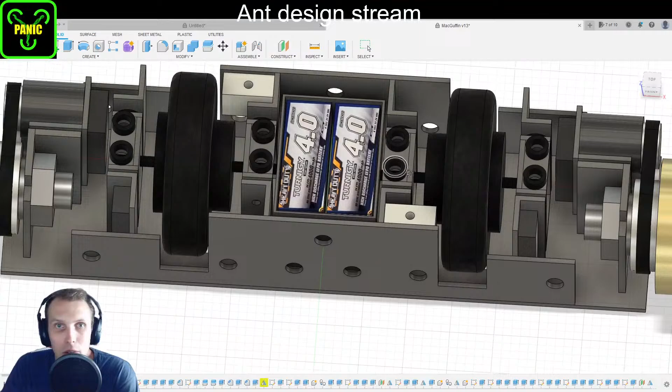These wheels in here are the same ones that Death Roll uses - a brushless hub motor. Yes, Death Roll uses 4, I was just going to use 2 because my focus was getting the weapons going. I wasn't really focused too much on pushing. But you can see how slim and compact I managed to get this design.

There is barely any room on either side of the battery box, and I wanted some space there. A, because there are actually bolts that go through there, and B, because even the battery box was going to be shock mounted, so the batteries could move just a little bit, which allows them to not die in big hits, basically. You can also see some of this stuff is fairly mocked up.

So like the weapon motors got mocked up because I'd CADed a lot of stuff and I was running out of time to put the application in. So some of the stuff like the weapon motors just got mocked up, and the belts and the drive pulleys and stuff just got mocked up.

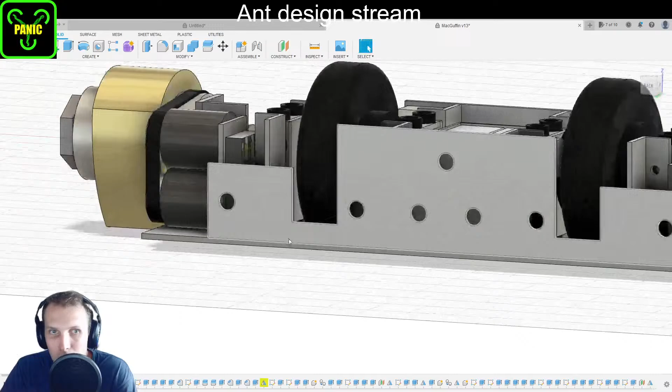But yeah, the actual laser cut parts, I would probably need another 20 minutes to an hour to get these ready for the laser cutter. There's just a few bits and pieces on them that would need to be filleted and chamfered and tidied up a little bit to have them ready for the laser cutter.

But also I would need to do this plate here. You can see it doesn't have any holes in it, and it needs holes for mounting up the brushless motors, for example, and also mounting up the brushless drive controller, which is that box there.

It's a double VESC, so that was going to run these two outer motors. And then there was another double VESC over here, which was going to run this. And then there was a single VESC here and a single VESC there, which were going to run the drive system. So MacGuffin is really, really compact for what it is. There's not really a lot more space I could have taken out of this. I could have maybe compressed it in that way, just a smidge.

I was pretty happy, in actual fact, with how MacGuffin ended up coming out of this whole process. It looked pretty good, and I could probably build this. At some point I might even go back to MacGuffin and build a featherweight version, or even a beta weight version. I think that would be pretty cool, but for now MacGuffin is just not happening.

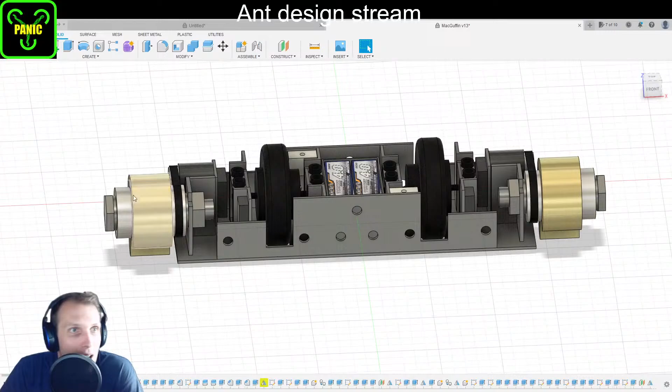Anyway, let's put the armor package back on, because I want to show you the armor package in a little more detail. So let's take off the whole front wedge. In Fusion 360, it's one body that I can just take on and off.

In real life, it was going to be two laser cut panels, and each of those laser cut panels was going to have little holes in it.

What are the dark gray boxes on the other side of the L next to the wheels, on the other side of the weapon motors? You mean this in here? That little dark grey box next to the wheels on the other side of the weapon motors.

So this grey box here was the VESC for the drive system itself, and this grey box here is the double VESC for the weapon. These are older, less powerful VESCs to run the drive than I was going to use to run the weapon system. The weapon system was going to be way more powerful than the drive, kind of on purpose.

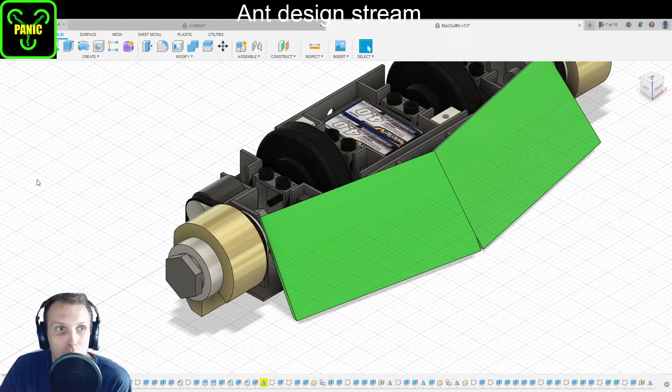As mentioned, this whole front wedge comes off. In real life, to get this into real life, I would need to cut slits into here so that tabs would come through from all of these wedgelets out the back, so that all of this could get welded together.

Effectively, all of these triangles were going to get welded to the back of each of these, and then welded to the base and to the back here. This back is the thing that gets bolted through into the robot with rubber spacers, so that the whole front wedge of the robot springs back, which means A, it will touch the ground properly, and B, when it gets hit, it's not transferring all that force into the chassis—it's absorbing some of that. However, this again is not fully finished.

There would need to be speed holes under here. In fact, did we do that for the back armor? No, we didn't—okay, that was bad of me. There was supposed to be speed holes in here that, A, dropped the weight of this whole armor package up front, but also allowed the welding torch to get in and weld these pieces, and also allowed you to get a wrench in and bolt the robot together.

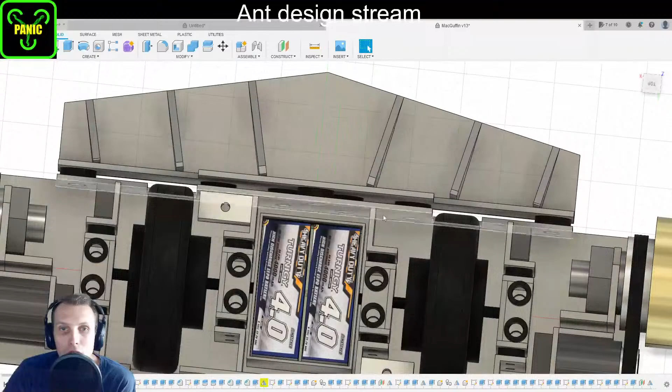You'll notice too that all of this is really, really tight. There wasn't going to be a lot of space in here, so I was trying to design with where do spanners go when you're trying to put bolts in. It mostly worked. You can see this here—this is a switch that is blocking a bolt hole right now, which isn't great. There's not really a lot of other access points to that bolt hole, but trying to put that switch elsewhere is going to be difficult. It could have been moved out maybe to try and fix that issue, but we are running out of space quite quickly everywhere in MacGuffin, basically.

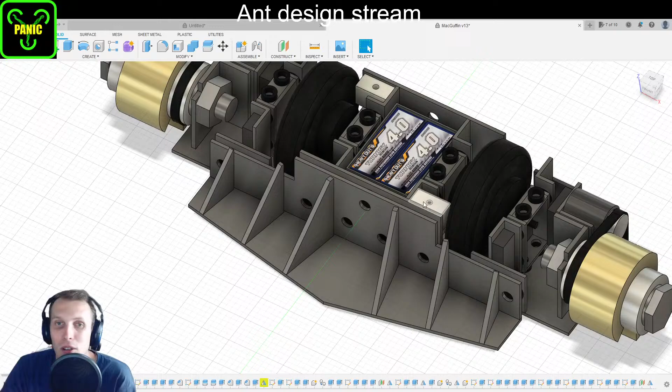And switches, weirdly, switches are the last thing I CAD every time, which does make the CAD process a little bit difficult, because sometimes the only neat place for my switch is directly under a weapon, and I can't do that.

What are my opinions on Project Liftoff and their advancements on multi-brain technology?

To be honest, I have been very lax on keeping up with the melty community in the robot space. I haven't actually been watching that many of Project Liftoff's fights. I know from people talking about them that they are performing quite well. I really do need to go back through and watch a bunch of their fights that have been in Norwalk and stuff.

The thing I'll say about Project Liftoff at this point is their distinction from other melties that I know of, because I don't really know what tech is inside their melty. I'm very keen to look at what brain they're using, what accelerometer they're using, all that fun stuff, like how they're doing their heading tracking.

But I know they're running cleats, like spiked wheels, at Norwalk, chewing up the floor to get really good grip. That's a great idea that works at Norwalk, because Norwalk is fine with replacing the floors in their arenas every single event.

Unfortunately I couldn't do that at ARC. I could maybe do it once, but enough damage would be done to the floor that it would need to be replaced, and they wouldn't want that. The floor is difficult to replace in the ARC arena, and it's expensive. We're a community club running mostly on money from people competing and donations, so there's not a lot of money to keep building and rebuilding things. So cleats, if they're not already banned, would be banned very quickly at ARC.

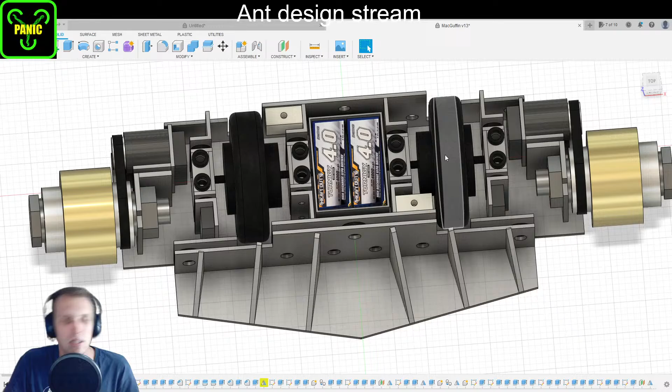Magnets near the center minimize induction. Putting the magnets closer to the center means they're rotating a smaller distance per rotation, so they're rotating slower than if you put them all the way out on the edge, which effectively means lower induction. If we just imagine MacGuffin being a melty for half a second, and you put the magnet right in the center, just one big honking magnet, that would be the least inductive place on the robot, because it's only going to get induction out of its own diameter, which isn't that huge.

So that might be the place to put a magnet on a melty, slap bang in the middle. Though that does mean putting effective mass into the middle, which, as a spinning weapon, you want to put all the mass as far out as you can. That'd be something to play around with, because further out you're going to induce more current, which I don't know is a good or bad thing. If you discharge that in the box, it's probably bad. If you don't, it might be okay. So magnets further out means heavier further out, which means hitting harder but inducing more current. Magnet in the middle means hitting less hard but inducing less current. Something to think about.

I might even, for the next application to BattleBots, put magnet holes in the bottom of the robot, just in case.

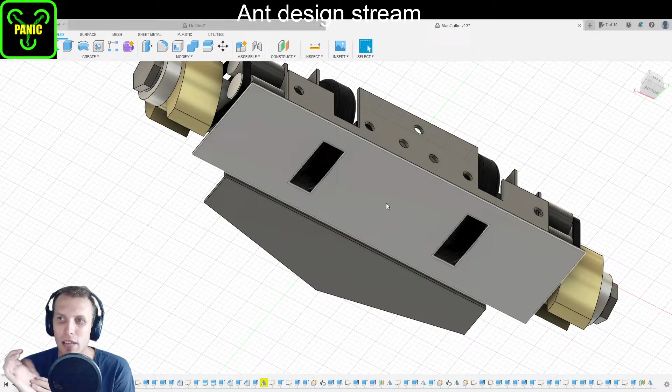Putting the magnet in the center also gives it less chance of high-siding the robot when it gets bent - jamming it up in the middle makes it harder for the robot to get stuck on it. Though bending is less of an issue than it collecting debris, and being in the middle certainly makes it less likely to collect debris, because the robot's spinning at high speed, so anything it contacts is going to touch a wheel before it gets anywhere near the center of the robot.

So that's probably a good idea for anti-high-sidedness. But anyway, that's MacGuffin there, fairly stripped down to its bare componentry. I should actually at some point do a stream where we go through some of the other designs, because it's interesting how much goes into these particular, especially heavyweight, designs.

Let's see, is my render stuff still active? It is, but the rendering gallery doesn't seem to have anything in it anymore. Oh, it does, but you can't see that on stream. That's annoying, it doesn't actually show up the rendering.

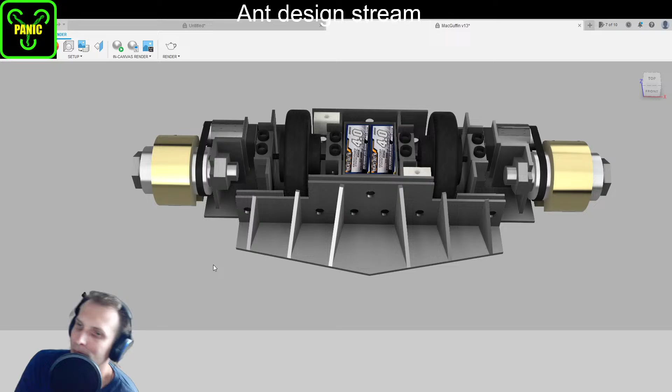I'll just point this out real quick. To compete at BattleBots, to even apply, I'd suggest getting an idea of how the rendering software works in Fusion 360. BattleBots want a lot of images of your robot - full layout, so a 45 degree, a top down, a front on, a side on, yada yada yada. They want beauty shots of your CAD.

They then want a shot where you highlight things, like here's where the batteries sit, here's where the switches are, here's what these are. They then want another one showing this is all going to be hardox, this is going to be aluminium, or whatever materials - they want them all listed down. So taking good shots and renders of your designs is very important for the application process to BattleBots.

Taking screenshots of this design screen isn't really good enough as far as I'm aware. I'm a person who's been rejected 3 times, so I'm in no way an authority on what the application committee wants out of a robot. If anything, I'm probably more of an authority on what they don't want.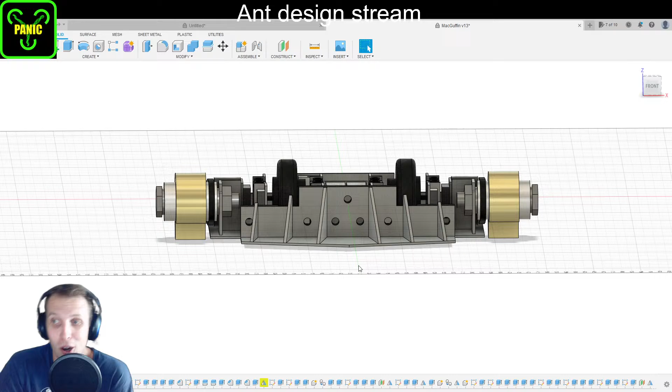Speaking of that, the final thing I want to do before going to bed, because it's actually getting quite late here, is let's take a look at Bolt.

Because I quite like Bolt, there's a soft spot in my heart for it. But that is the wrong Bolt. Despite being called Bolt Master, that is not the right Bolt, because that is a very empty Bolt right there.

The correct version of Bolt - yeah, here we go, this is the correct version of Bolt. This has got so many components in it that you can't see, unfortunately. Let's just start turning some stuff back on. Also, yes, this is the version of Bolt where the weapon blade and stuff got pivoted back out of line with everything.

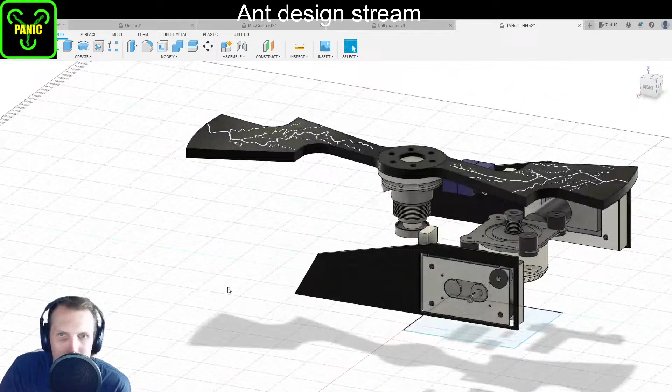So this is the other thing - these are all shock mounts, which have been pivoted. That's very, very odd, I don't really know why that's happened. They should be flush between these 2 plates here, but for some reason they're not. I think it's because they're an imported part, maybe a McMaster-Carr part or something along those lines.

Let's see if I can find out why this weapon is in the wrong angle. We've got 2 different wheel sizes as well. Man, it's been a long time since I've been in this CAD and actually had a look at it.

Oh, and all of our electronics are pivoted up out of the way as well. So this is batteries, a switch, and a very warped looking speed controller. The decal that I put on that has definitely not stayed where it was supposed to. And again, on the other side, there was going to be a switch and batteries and all that kind of stuff. The shock mounts on the weapon motor are a bit derp as well.

Oh yeah, those are very derp. Those should be flat underneath the plate that mounts the motor. And then this motor should - so you can see this triangular block out here, that should be down at that angle, and then all of this stuff is down as well. You can see that's where a serpentine belt goes between here and there.

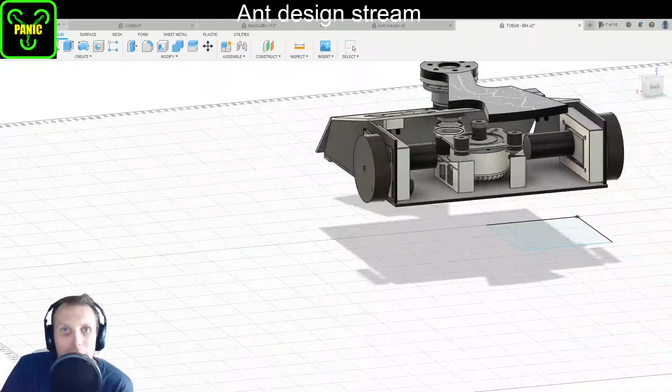Bolt, I actually had help with Jamie, who builds Iron Tooth, amongst other robots at ARC. He helped out with some of the CAD, so there is a lot more detail in this CAD than I would sometimes do for a design like this.

So I feel like I'm missing a thing still, because I'm missing a back and a top, which this robot got - I applied with this robot to BattleBots, which means it needed to have the top armor on it as well.

Let me see if I can find in... right, might be. Oh, okay, that part is called top armor, but it's the front top armor, it's not the top armor. It's the other problem with a robot that has 2 tops on it - you need to make sure you've got everything labeled correctly.

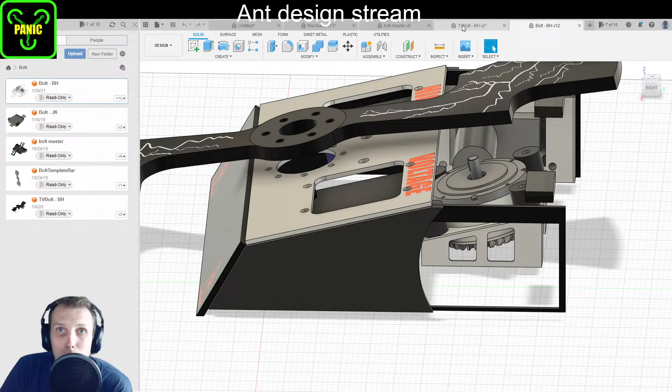Okay, let's see if I open up a different design, if we find a better Bolt. Okay, that's definitely not a better Bolt. That's definitely a further back down the design path Bolt. Ah, here we go, this has at least got things like in the right orientations, so this might be the better Bolt here. I don't know why the other one actually isn't all that stellar.

Okay, oh yeah, we've got artifacts from putting the symbols on there on the inside. That's interesting, Fusion 360 doesn't do a great job with putting decals on things, or at least I don't do a good job with putting decals on things using Fusion 360. I'm sure I'm just doing the wrong things.

The Bolt BH is the file with the last modification date. Right, yeah, well that would make sense. It does seem to be the one that I took the render photos for BattleBots for, because it does actually - yeah, see, look, this one's actually got top armor on it. Yay, we finally found it.

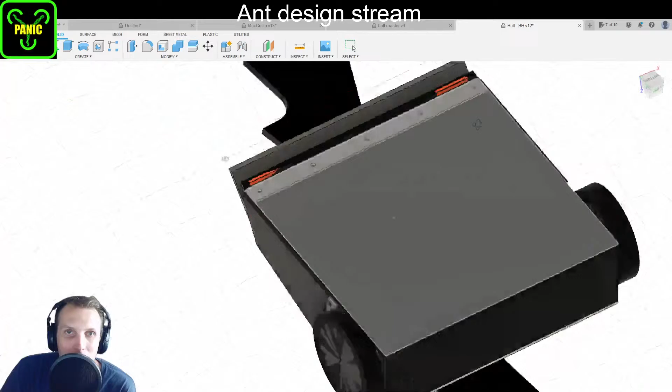Yeah, once I've found the stuff here, I will very quickly show you inside it. Because I think, yeah, heavyweights are interesting - heavyweights are more of a design challenge, he says, not having ever actually had to build one yet. But also, this is something that I will point out too - so not only have we got 2 front armors here, I was looking at different arrangements of scooping angle and things.

But also under here, so this little block is a HDPE or UHMW skid block. So the idea with this was that it would be the thing touching the ground and not the front wedge, because at the time when I designed this was BattleBots' old floor, and people were cutting holes in the floor constantly.

Seams on the floor were a massive issue, and the ground game wasn't anywhere near what it is today, so you ended up with people hitting ledges on the floor and getting stuck. So I put a skid plate right behind my wedge, half a mil higher than the actual face of the wedge, which means this is the point that contacts the ground. So riding over bumps should have been okay.

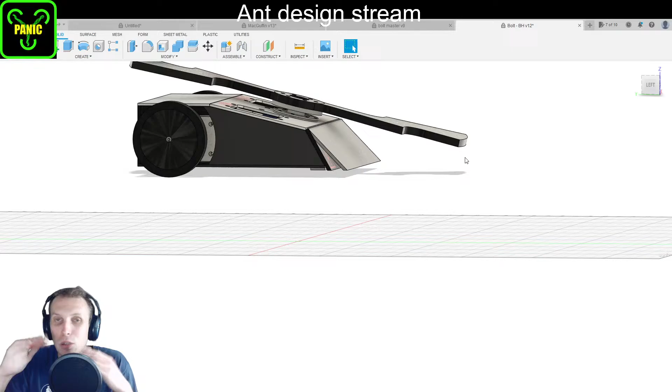The other reason I was okay with that was that the weapon height off the ground was tiny, so you'd need endgame length forks to get under this without being hit. And this was designed in 2019, where nobody was running endgame style forks.

Then wouldn't you want to chamfer the edge of the skid block? Yes, probably would have. Again, this was a CAD to get into BattleBots, not the final CAD. The big secret is that all of my CADs ever submitted to BattleBots would have needed half an hour of extra CADing to get them to a point to actually manufacture. Stuff like chamfering a leading edge on a part would actually get done before the robot got manufactured, if BattleBots is like, yes, you are coming to BattleBots.

So if we take the bottom off, this is the easiest way to see the robot. This probably would have been how the robot was serviced. You can see old school mag motors and gearboxes. I was actually going to run them on VESCs, just VESCs in brushed mode, getting all that working.

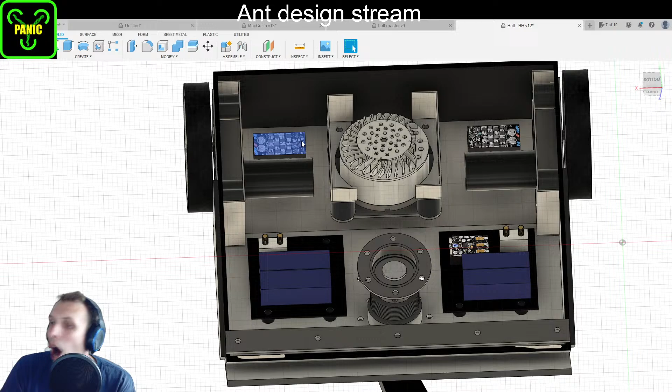Bring shims to take any wear on the skid block as well. Oh yeah, that skid block was a fully replaceable part. I was going to take like 8 of them and swap it every single fight basically, because it was literally just going to be a long thin strip of HDPE or UHMW. So it was an easy part to manufacture and cheap to have, wasn't going to take up much space or weight in a crate. So make 10 of them, bring them with you, no real issue, and as they wear down you just use them as you go.

So 2 VESCs in the back to run the brushed mag motors. Mag motors? Can't remember if these are mag motors or not, but they were one of the common brush drive motors at the time, so I was like, cool, just use what works. Get that all working, Whyachi switches, a big old brushless VESC here for actually an electric car brushless motor.

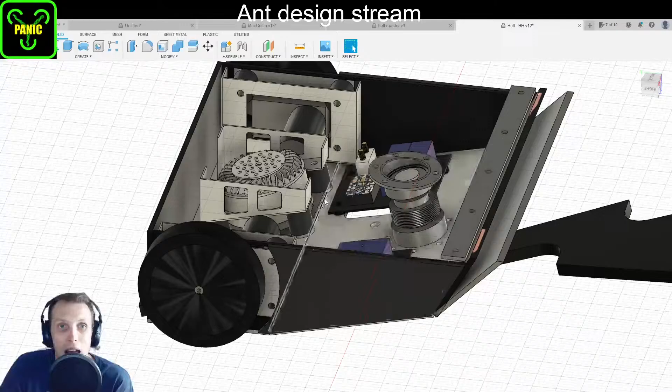I figured that the power rating on these was going to be way better than any form of drone motor, so I was pushing this to its limits of rated power to spin up this weapon. But I figured it would be okay because it was designed for an electric vehicle, so it should be pretty solid. And it was going to be shock mounted in the frame, as were the drive motors and all the electronics. The trick is the electronics are shock mounted, but these internal panels were going to be HDPE with all the electronics mounted to them, so you've got shock mounted plastic that can wobble around. Nothing in this robot should have taken a really big hit.

Approximate weight, 250 pounds. That was the goal, to do a 250 pound robot.

The actual weapon itself, if I can find it in the giant set of stuff that is here. Let's see if I can find it. Right, that one body, properties. Oh, and of course you can't see my properties thing. The weapon mass was 38 kilos, so of the 110-ish that BattleBots allows for the whole robot, it was a 38 kilo weapon blade, which I think runs afoul of the current rules for how heavy a weapon can be, so it would have needed to be changed and modified.

Also, I will say, one of the things that happened with this...

Just grab the weapon behind you and put it on the scale.

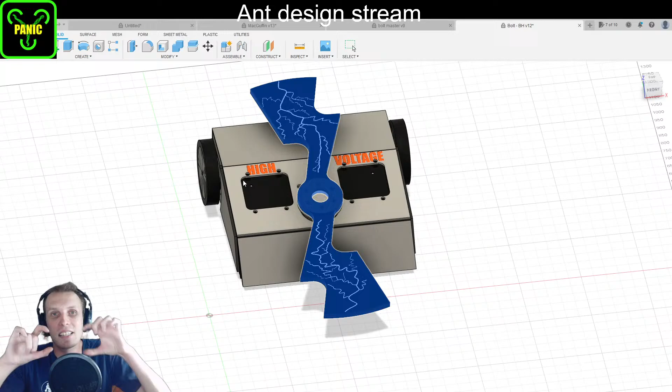So about that, that's actually one of the problems Bolt had. Yes, I have a Bolt blade, but no, it's not made of steel. It's actually stacked, laser cut pieces of MDF, and it wasn't even the final thickness. The blade up behind me is maybe 12 mil thick, and this blade is 25 mil thick. So over double the thickness of the wooden blade I swung around in the application video.

And that was part of the problem. I built a wooden blade so I could swing it easily for the video, because I didn't want to pay to make the steel blade before we'd been accepted into BattleBots, and because it was flimsy, thinner than the actual final blade was. The selection committee took one look at me easily swinging the wooden prop, thought it was the final steel blade for the robot, and said no.

They were like, no, your weapon is going to break. And I was like, that's not... Oh shit, I should have added a piece to that video of me cutting, gluing, and painting that wood to make it look like a blade, so there was context that this isn't the actual blade for the robot. It's just a mock-up so I could do the final shot of the video, which was me swinging a wooden blade through some pictures of some BattleBots.

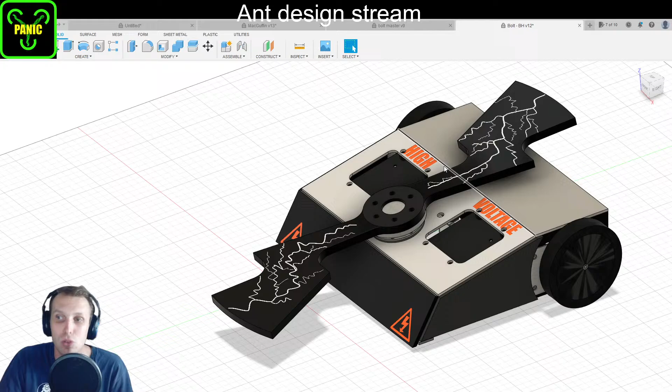Any other big slanted angled bar spinner like Apex, for example, is cheaper for BattleBots to get to BattleBots than it is for them to get Bolt to BattleBots. So why would they ever choose Bolt? The answer is, they didn't. For me as a builder with no pedigree in BattleBots, I have a very hard uphill battle and a very high bar to clear to make it worth BattleBots getting my robot there. That's just the nature of being in Australia, so far away from everything.

Yeah, just smack them with the steel in it. Well, yeah, that's kind of what happens with the big spinny weapon.

For downforce, you'd want a centrifugal fan rather than an axial blower, wouldn't you? More pressure, less flow. I don't know, that's so far outside my wheelhouse of things I've looked into that I really don't know. I will say, when I built my 150 gram ant weight downforce robot that had a fan blowing air straight up to suck itself to the ground, I just used a drone motor and prop. It's possible that wasn't correct and I really should have used a motor designed for suction, but again, that's not my wheelhouse. So I used what I knew and was available to me, and it worked pretty well.